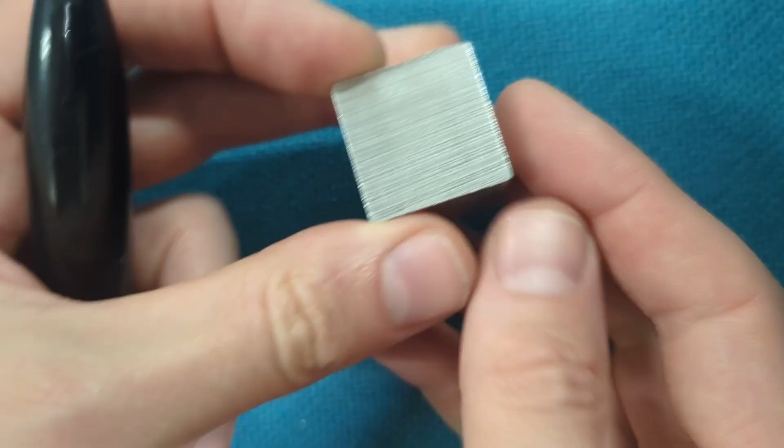Next, let's talk about a work coordinate system. A work coordinate system is how you connect the real world to the virtual world in Fusion. Let's start by making the real world look more like Fusion.

Get a Magic Marker and find the face of your metal cube that was cut with a bandsaw. You'll be able to feel the ridges of the bandsaw if you slide your thumbnail across it. And write on this face the word top. Then flip the cube over and write the word bottom.

Then pick any of the remaining 4 sides and write the word front. And from there, fill out the other 3 sides logically with back, right, and left. Then find the corner of the cube where the top, left, and back faces all intersect and put a little black dot there. This black dot marks the origin of the work coordinate system that you're going to use to do all of your work on this piece of metal.

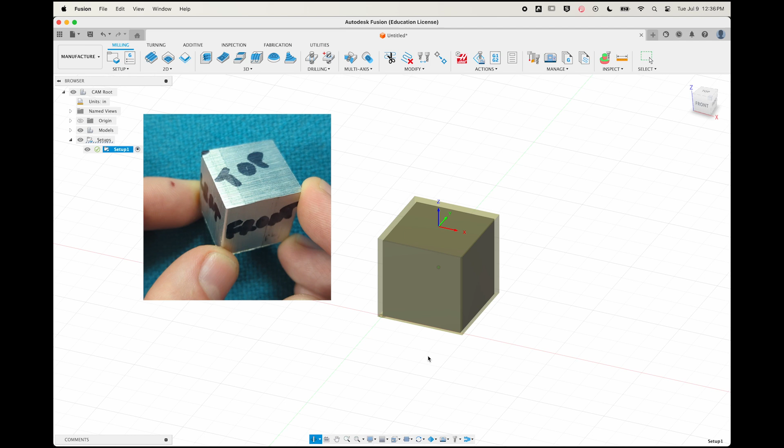Now in Fusion, orbit the view until you're for sure looking at the word front in your compass, and notice the triad of XYZ axes sitting on the top center of your cube there. That XYZ triad is your work coordinate system, and I want you to move it to the back left top corner. And if your setup isn't already open, double-click on it to open your setup, and click on the Setup tab, and look at this panel right here for work coordinate systems.

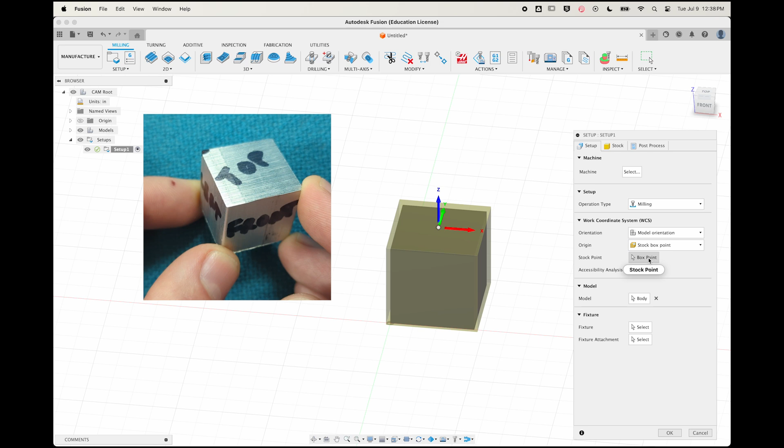Make sure that the origin of your work coordinate system is going to be set to a stock box point, and then choose the box point by clicking on this box point button. When you do, you're going to see a host of clickable points show up on your stock, and the one you want to choose is the top left back point.

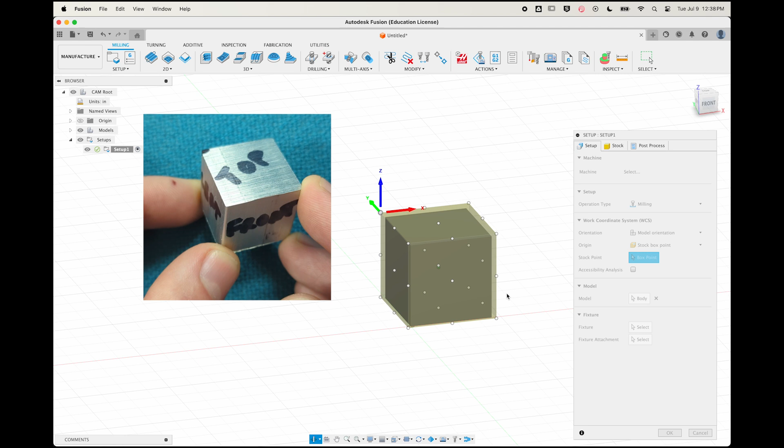When you do, just make sure that you're looking at the word front up in your compass and that you're choosing the one far away from the front, and that you're seeing the word top on your compass and you're clicking on the one on the top. And as you do, imagine that what you're connecting is this virtual corner to the real corner on your metal that you marked with Magic Marker.

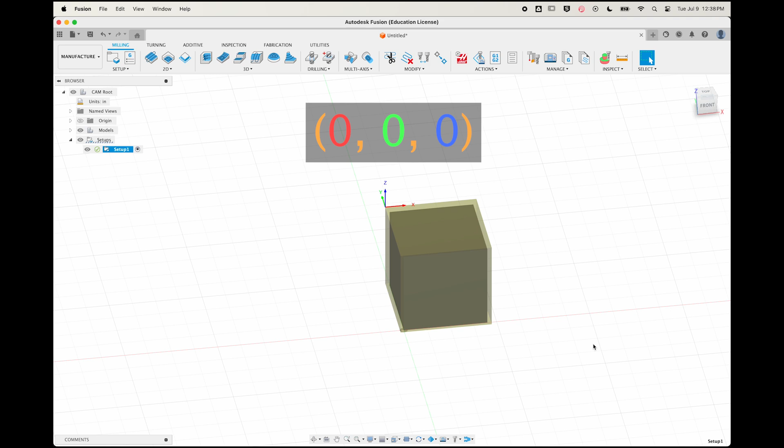Click OK on the setup panel to confirm that choice, and notice how the triad of XYZ axes stays there in your top back left corner. This is the origin of your work coordinate system. It is 0 on X, 0 on Y, and 0 on Z. Good, now let's do some work inside of this work coordinate system.

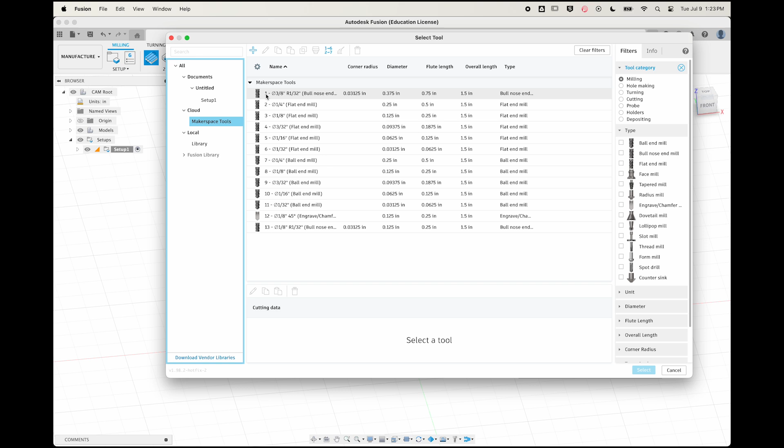Come on up to your toolpaths and click on the 2D drop-down and select Face. In the facing parameters, we're only going to do one thing. We're going to select a tool. So click the Select button and come to the Cloud library, select Makerspace Tools, and then select Tool 1, the 3/8 bullnose end mill.

And if you're not seeing the Cloud library, just come over here to the silhouette and choose Preferences, Manufacturing Preferences, and check this box next to Enable Cloud Libraries and click OK. If you're a member of my class and you're still not seeing this, let me know. Otherwise, just do a bit of Google searching for how to make your own 3/8 bullnose end mill.

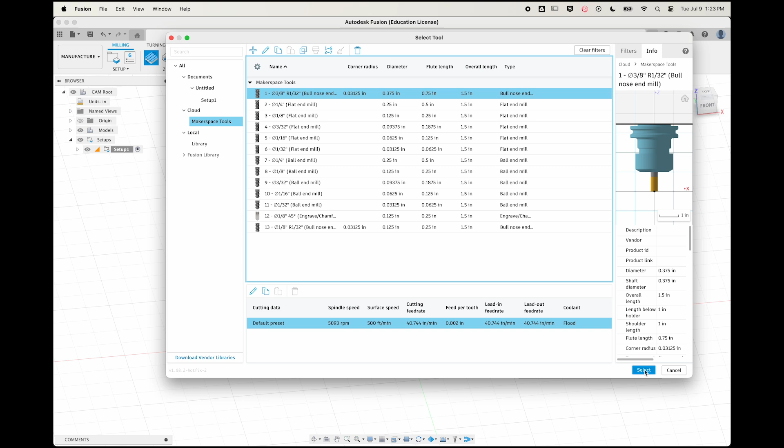Okay, having selected it, just confirm that you're seeing it here. Tool 1, the 3/8 end mill. And then look for a couple of parameters. The surface speed should be set to 500 feet per minute. The feed per tooth should be set to 2/1000ths of an inch per tooth. And the spindle should be spinning a little above 5,000 RPMs.

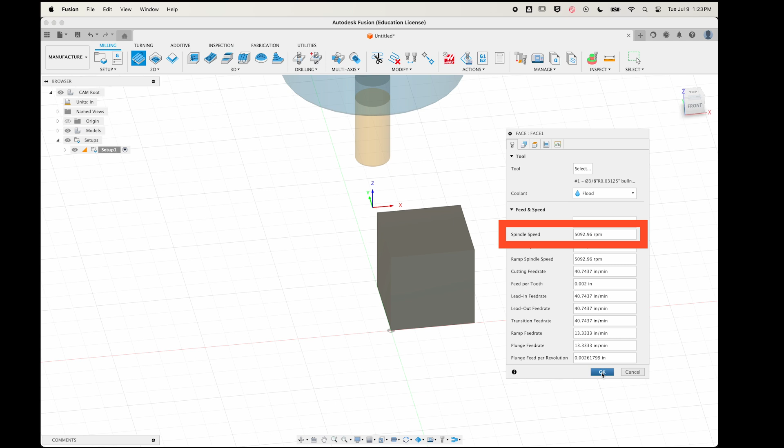In brief, surface speed is how fast the tooth of your tool is hurling itself through space. Feed per tooth is how big a bite that tooth is taking out of metal every time the tooth shows up. Spindle speed is how fast rotationally your tool is spinning around and around.

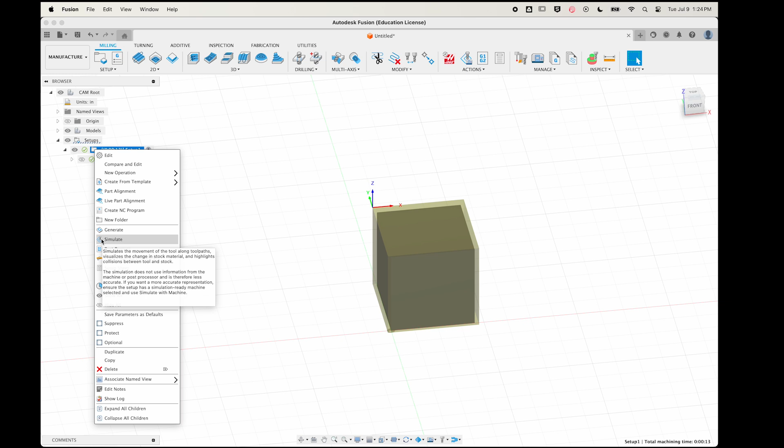Click OK to create this facing toolpath, and notice that it pops up over here under your setup, and notice that you get a visualization of the tool itself and the path that the tool is going to take from start to finish. Let's simulate this toolpath. Come over to your setup and right-click on the folder icon and choose Simulate. Then look down at the bottom at this green bar. This is a time bar, and I want you to click on the left-hand side and drag slowly across it.

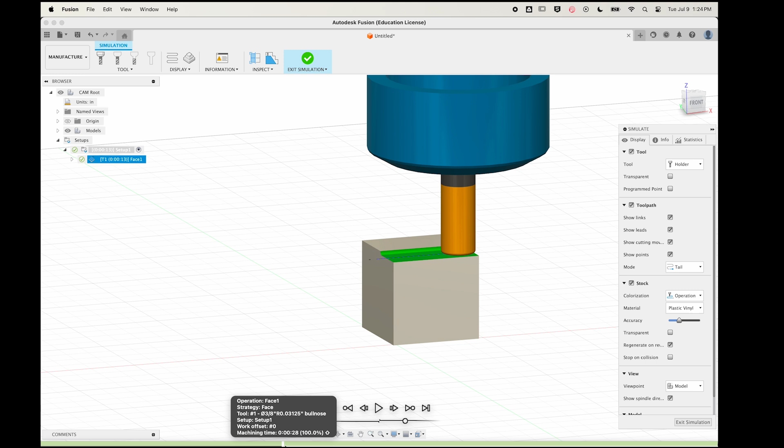And watch the tool come down as it plunges through air, leads in towards your material, then starts cutting your material, leads out of your material, swoops a little further back, then starts cutting your material again, leading out and in, cutting, leading out and in, cutting, leading out and in, and cutting, until it has cut the entire top face of your stock off, revealing for the very first time the perfect model underneath it.

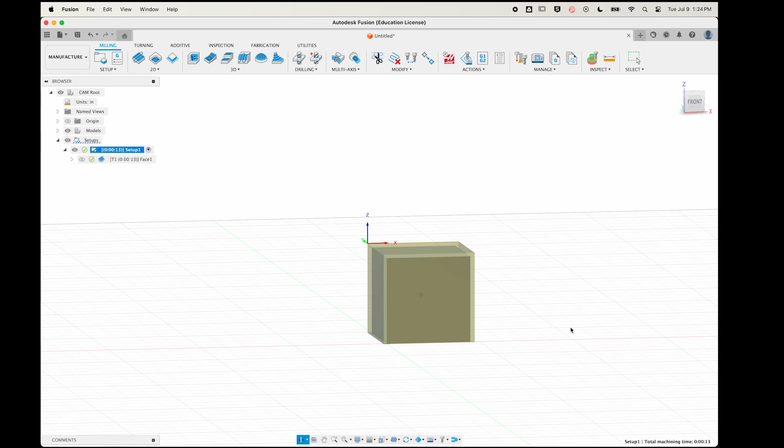Great, click Exit Simulation and orbit your view so that you're looking right across the top of your stock. And then simulate it again. Right-click on the folder, Simulate, and drag that time bar from left to right so that you can really see how the tool is coming down into your stock, back and forth, creating the top plane of your model.

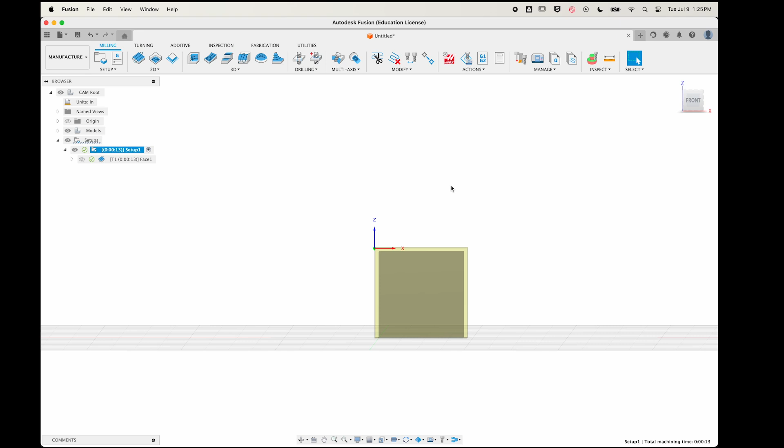Click Exit Simulation, and congrats, you have made your first toolpath, a facing toolpath, and you have simulated it. Next, we're going to talk about getting that data out of Fusion and over to the CNC mill.